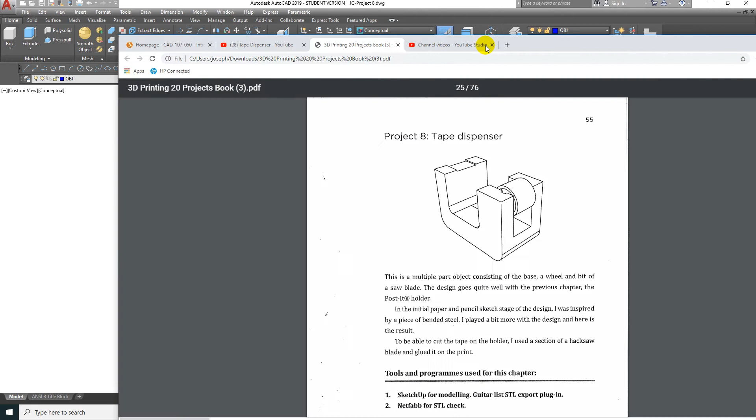Today we're going to model this tape dispenser using AutoCAD, and we're going to take the assignment from our textbook, Projects for 3D Printing, Tape Dispenser. Let's take a look at this project.

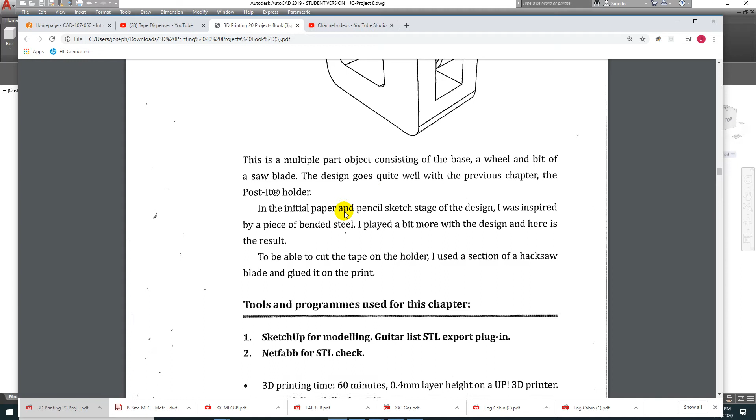Essentially, it's nice. I'm always looking for tape dispensers. We've got the post-it note holder from the last chapter, and we might as well continue to fill our desk with other items we can use to organize.

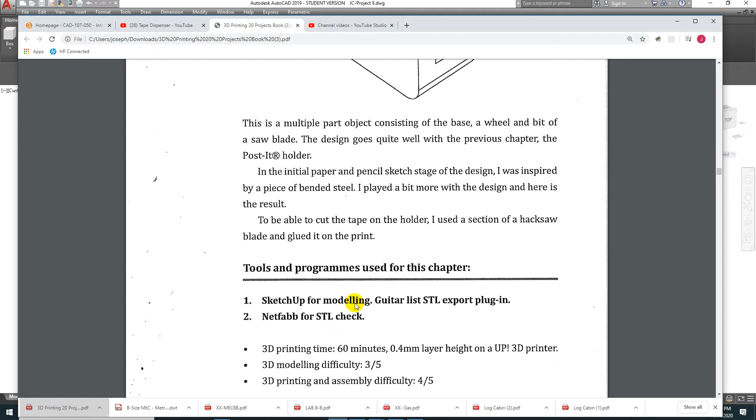He uses a program called SketchUp for modeling it, but we're going to use AutoCAD. He uses an export plugin. AutoCAD allows you to export this as an STL, a stereolithography file, and then he's using Netfabb to slice it for the 3D printing, and we'll use our Dremel 3D45 printers.

3D printing time estimated at 1 hour, 0.4 millimeter layer height, which is a low resolution setting for the printer. He's using an Up 3D printer. Difficulty for modeling is 3 out of 5, and 4 out of 5 for printing and assembly.

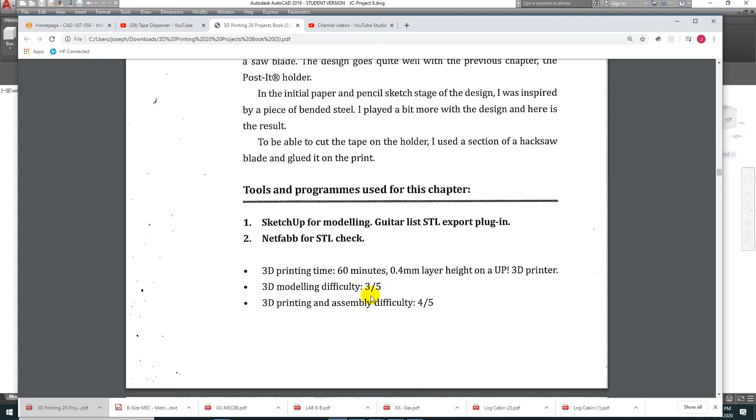It is a little bit more difficult with AutoCAD than with some of the other programs because it still has a lot of 2D elements, but I find I can do everything I need to do with AutoCAD, and the price is right. So if we take a look at the dimensions here, essentially we've got...

Kind of a rectangular shape, and it has dimensions in millimeters, and the way he recommends—and I really kind of like this from a general design standpoint of how to model it—just a step-by-step approach geometrically.

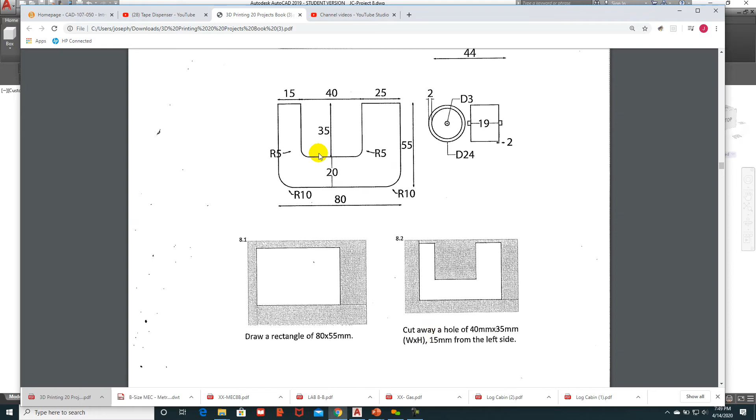So draw a rectangle and then create this cutout, and you can use offset to do that, and you'll get these dimensions from the print. So you have to relate 80 units by 55 units to 80 millimeters by 55 millimeters.

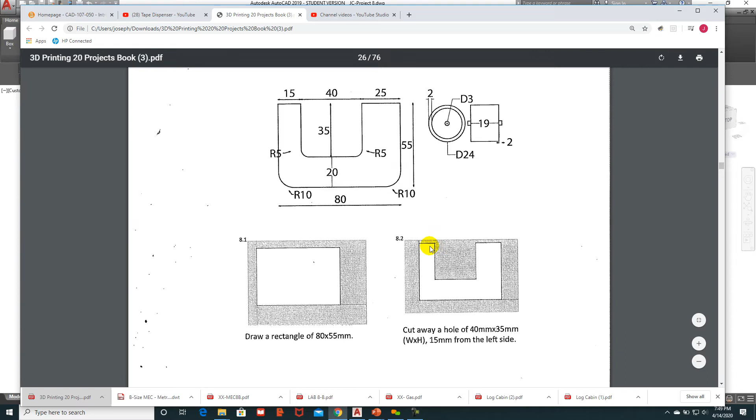And then as you start to learn how to read a drawing, this is 15 millimeters from this edge, and then 40 millimeters from this edge to here, etc.

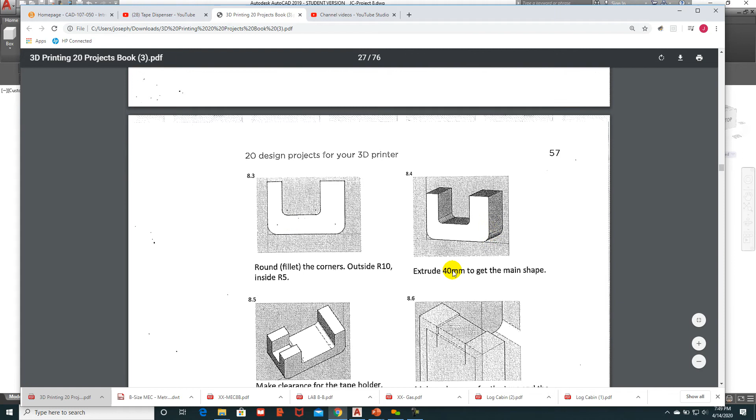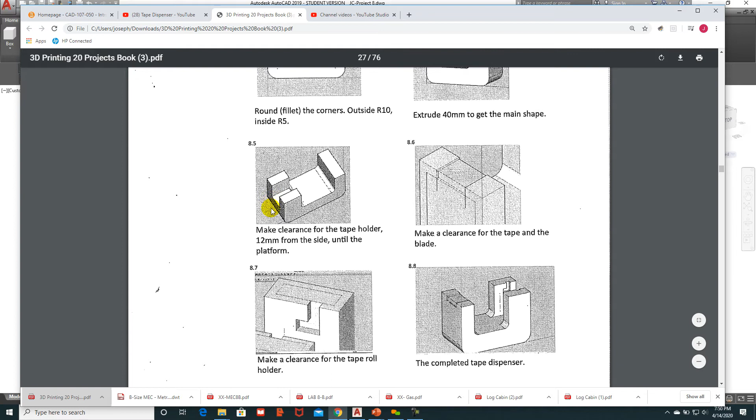Create the basic sketch or the basic shape, and then you can extrude it or press-pull at 40 millimeters. And then to make these clearances, I'll show you how to use AutoCAD with 3D techniques like manipulating the user coordinate system to create these cutouts, and we'll also model the tape holder.

So let's get started.

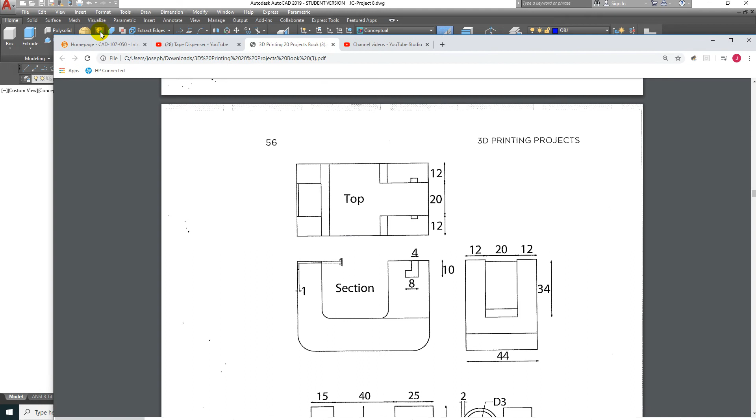I have the completed file here, and in D2L what you want to do is download the metric template. So if we come back here to the home page...

We go to content, title blocks. We have a B-size metric title block, and you can download that and then open it. When you open it, you're going to notice that it might not see it right away because AutoCAD looks for drawing files.

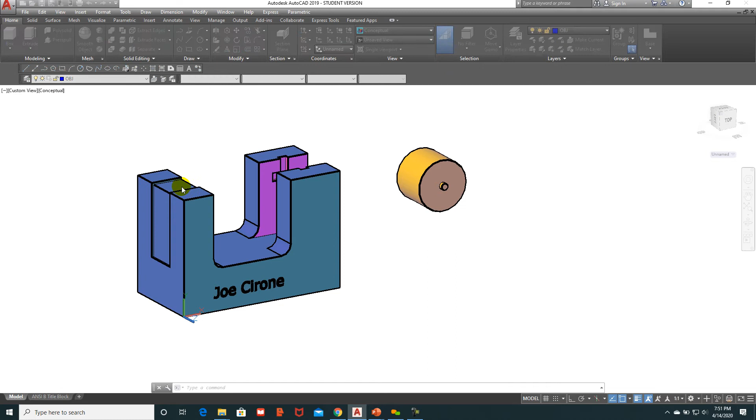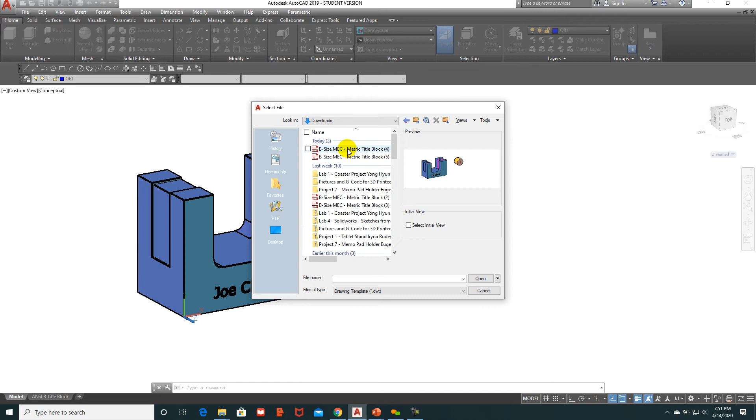Switching back over to AutoCAD—I don't know why it doesn't stay in that path, but we'll have to go back and retrain it to find it where we downloaded it. There it is, my B-size metric title block.

We don't draw the objects in paper space, we draw them in model space, so we'll select the tab here. Paper space is an environment for printing or displaying the object on paper, and model space is where we'll do all the work. What you'll do is start off by setting up the interface.

We're going to use a 3D modeling workspace for this exercise. I've enabled that here, and I'm really not a big fan of the grid—don't really need it at this point. And so here's my ribbon.

I've also enabled the menu bar by going to this little arrow here. I could hide the menu bar, or show the menu bar. These are toolbars that I added because I use them quite a bit—the draw toolbar, the layer toolbar, and the properties toolbar. You can do that by going to tools, toolbars, AutoCAD, and then enabling them and just docking them.

Alright, so we can go with the line command and start with a line, and we can draw that. Let's change to layer object, and we'll draw that. We want that line to track, so we want it to be horizontal. Turn polar on, and there we have our tracking line, and we'll say 80.

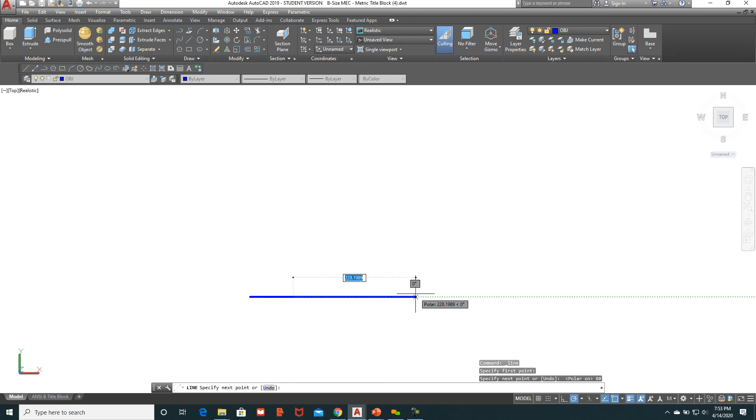And then we'll draw another line, turn the wheel on the mouse, 55, tracking north, back this direction 80, and then close it.

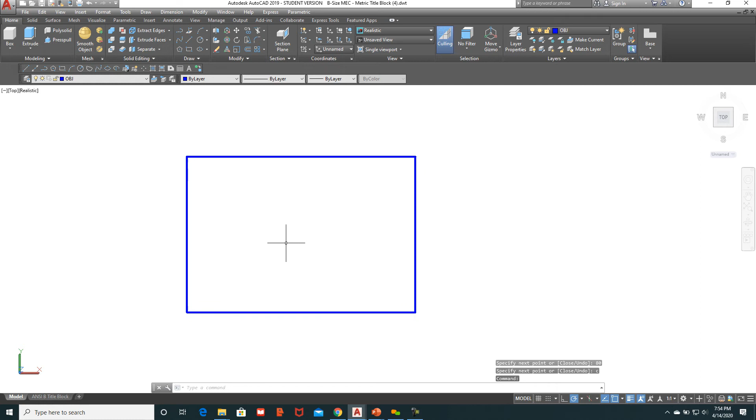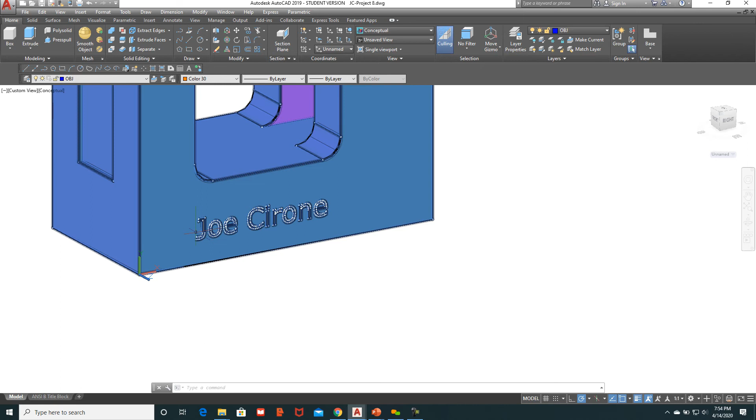And then we can start to create the geometry. Now, to make this part, I already worked on the exercise, so I'm going to display that from my finished model. What I did was break it down into all the steps. I moved the model way out to the side because when you engrave your name on it, you need to use a 3-point UCS and be in plan view. So I wanted it to be all by itself, not with all my other geometry, which is here.

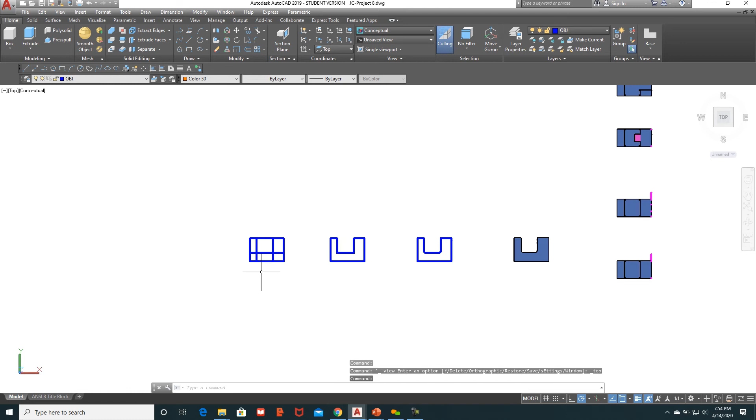So if I go through and explain this, we'll go to a top view, and then we'll zoom in. So this is the 80 by 55 basic geometry.

If we wanted to put a dimension on it, dimension, linear, it'll probably come out a little subsized. Yeah, so let's not. Let's just go to distance, and we'll go from a distance from here to here, and you can see that's 80, and then we can repeat that, and go from here to here, that's 55.

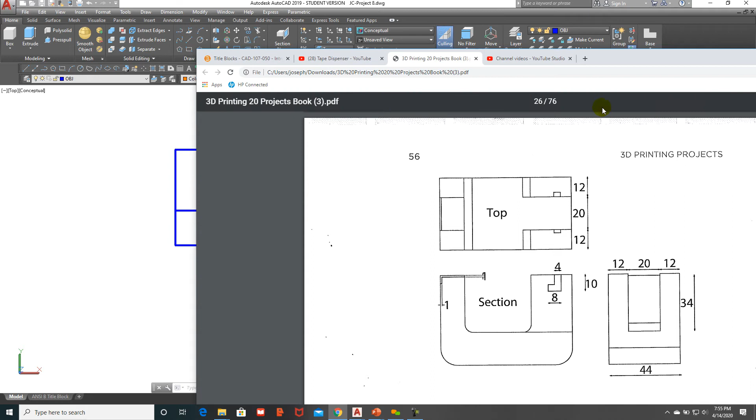And if we look at these offsets, these are taken from the blueprint, and as we start to look at how to model this, this is offset 15, and this is offset 25. So from here to here it's 15, and from here to here it's 25.

I'm going to just update my dimension scale so that when I put my dimensions on, we can see them. So under the Fit tab, when we use metric, 25.4 is a conversion factor, and we'll see how that looks. Much better.

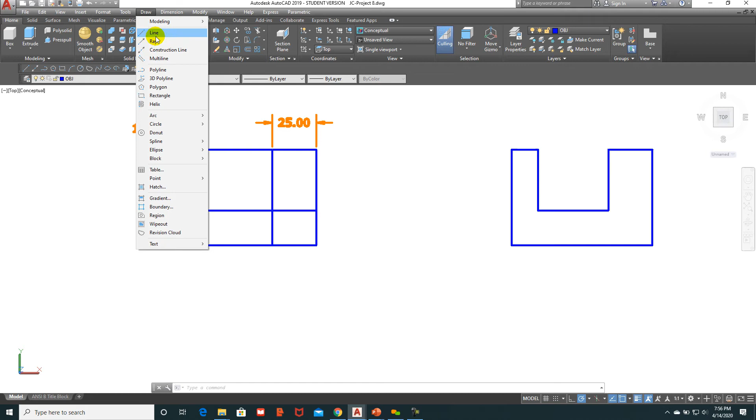And so we model it with these dimensions, or we just basically draw it. This is just a flat 2D at this point, what's called a sketch in your modeling software. You just want to create it to the dimensions that are given in the textbook. And that's roughly how that works out.

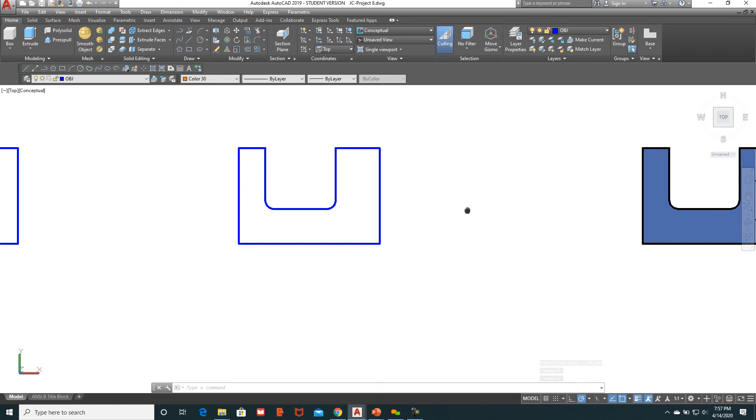And then you can trim out this geometry like this and place a 5 mm radius on this edge. And then what we want to do is to press pull this into a shape.

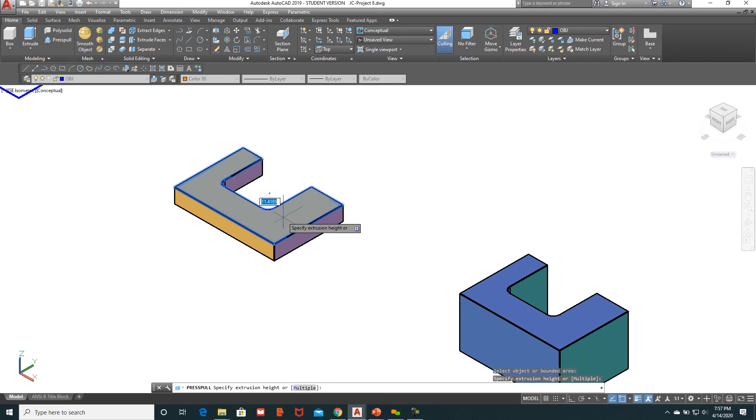So what we would do is grab an isometric view, and with all the geometry we can name a view and restore it. Maybe a little bit easier, but essentially what I did here was press pull it, because when you press pull it creates a region or boundary shape, which if you just extruded it you would get a surface. So you want to make sure this is a closed polyline or a region, and that's what press pull does.

It runs a macro that will select all the geometry and then make a region, and then we would make that a thickness of 44 millimeters. And then what you would do once you've done that is to take the geometry and 3D rotate it.

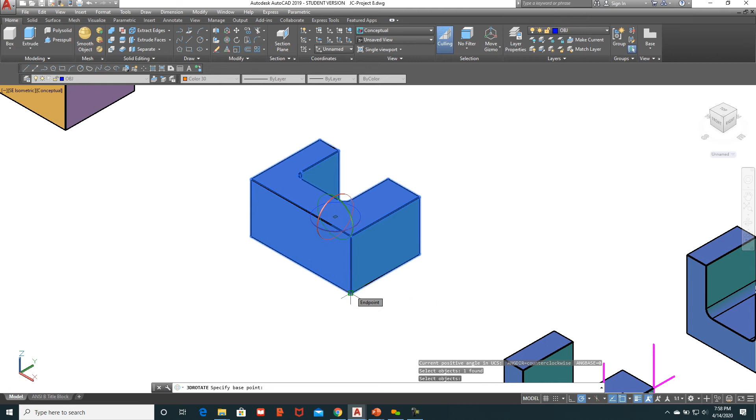So once we have done that, we would use the 3D rotate command. You select the geometry, press enter, and then specify using an O snap a base point, and read the prompt. Down here at the bottom it tells you what it wants.

Pick a rotation axis, so I'm going to pick this red band here, and then it says select the starting angle, and again you want to track it so you see that green line, and then bring it over this way until you see the green line again.

Now if you make it a little bit off, it is difficult to fix, because 1 degree off of perpendicularity is not good. So if you have trouble getting it to track out like that, use ortho, and then you can only move it in 90-degree increments. You can do that if you've had too much coffee.

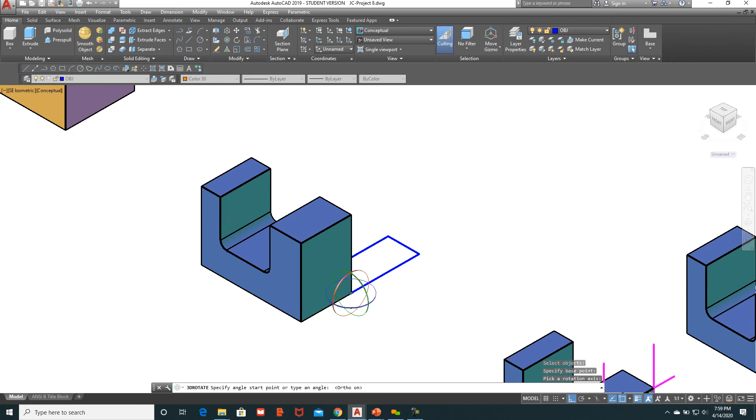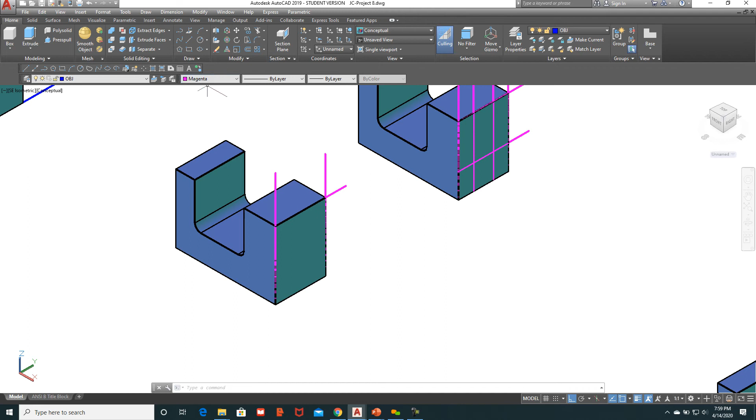Then once we have that rotated into the correct orientation, you cannot offset a solid. So there's a number of ways you can extract the edges and put geometry on, but what I do is just old school: I'll go into my object layer, change the properties, which is the color, and then trace over the edges of the solid model.

Now you can trace over the edges, and what I recommend is you do that in 2D wireframe so you can see it. Then what you need to do is the calculations to offset and create this shape here, and you want to use a 3-point UCS on that.

So over here, even before you trace over it, what I'd recommend is you type in UCS, and then select 3-point, so I'll just type in 3. I could also hit the down arrow, I believe.

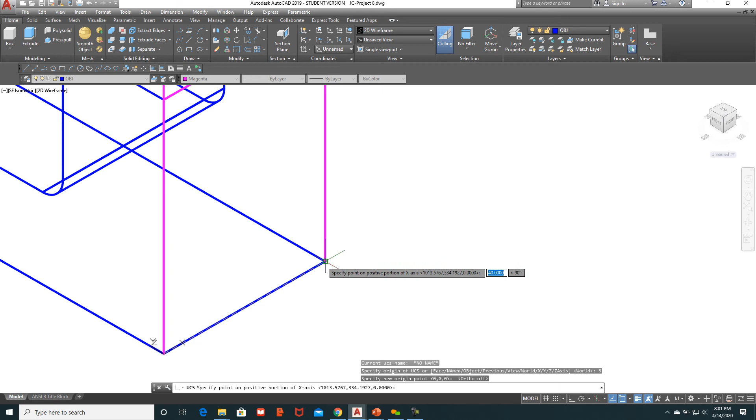It doesn't have 3 on here, I don't know why. I've always used the 3-point UCS, but I'll say 3 for 3-point. The first point will be the origin. I have to take off ortho, that's making it jittery. Then it says positive X, so I go positive X, and then I'll go positive Y. And that sets up the UCS icon.

When you think about 3D drawing, what you're really doing is just manipulating the XY axis. And so now we're just drawing on the side of this.

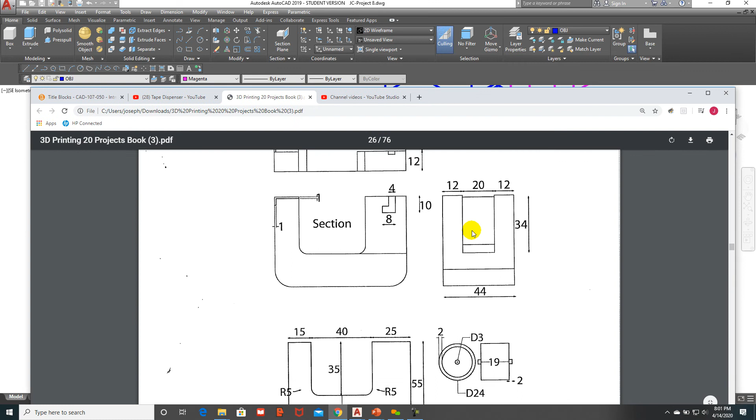If we wanted to create this construction over here, we can look at our tape dispenser cutout, and we can say that cutout is 20 millimeters, 12 from each side. So I traced over the edges, and I extended them out just because I like to exaggerate it. Once I've traced over the 2D geometry onto the solid model, I'll offset this line 12, and then offset this line 12 the other way, and then this will be 20. It's just the numbers all add up that way.

And then what I did was I trimmed it, and then I press pulled it. But you don't necessarily have to trim it - I could just press pull it.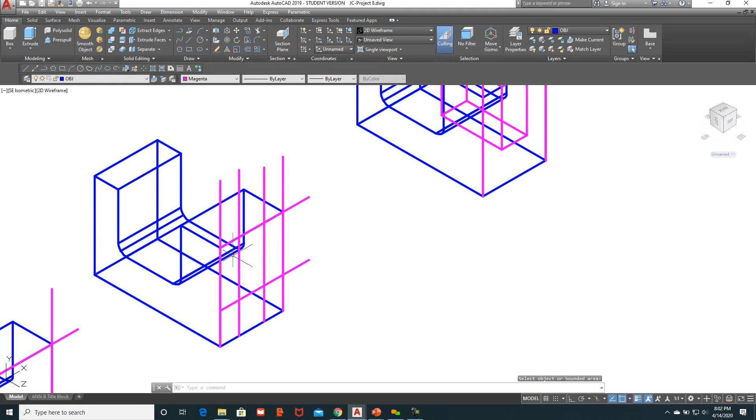If I go and say press pull, and I hover right here, you can see it's acquiring it. If we do it in conceptual, I guess it just looks cooler, but it eats more processing time. So you acquire it, and then you just pull it through the geometry right there. With press pull, when it goes into another solid, it will subtract it. And there we go, we've got that subtracted out.

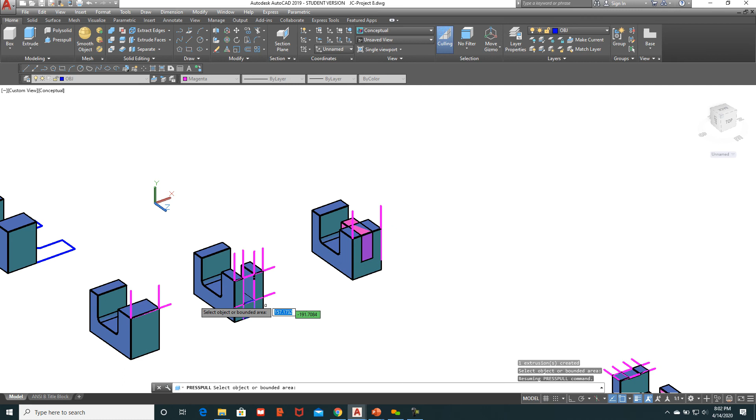So that's what this component is for this tutorial. And then we'll come over here and we'll use that same technique where we're going to put a 3-point UCS on the top of it, and then we're going to press pull this down 1 millimeter.

The way that would work would be, we have the geometry over here, we've already cut out this part, and then we'll put a 3-point UCS on it. So again, UCS, type the number 3, and then origin, where X and Y and Z meet, positive X direction, use an endpoint OSNAP, positive Y direction, and then the Z-axis will be perpendicular to that. So now we're drawing in the XY plane on the top of the tape dispenser right here.

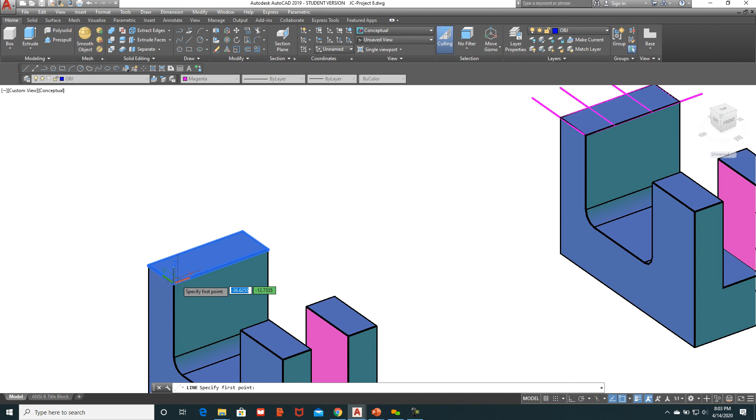What I like to do again is I just like to trace over it and kind of exaggerate those lines. So if I come in here with a line, you want these lines to track and to be straight. So you put on your polar - if it's 1 degree off, it's not going to be as good as if it's directly on 090.

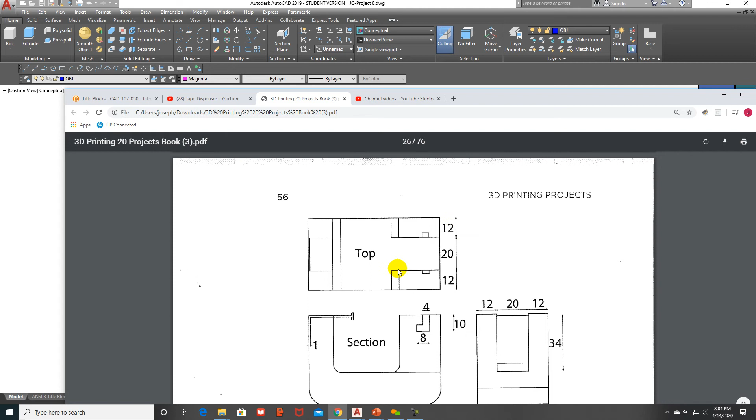And then I can take and look at my print, and I can say, okay, how far is this in here and this one? And it's 12. He made these line up, or at least I will, as we go through and we do that.

So you need to know which view to look at in what's called an orthographic drawing, which shows you the front, the right side, and the top view. He says this is a section because he cut it down the middle so you can see this little relief for the tape dispenser wheel.

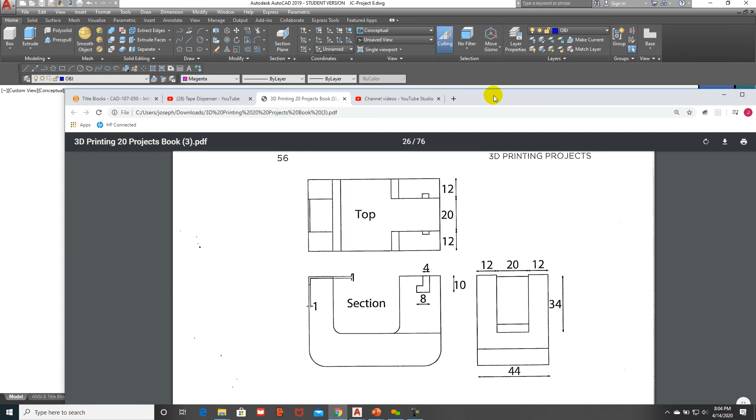So we're going to just offset this 12, 12. I can come over here and I can say offset 12. I can do the same technique on the other side. Yes, I know I could go 20 the other way and just continue going, but I like to follow the blueprints as I develop my drawings.

It takes time. And then I need one more on the other end because I need an enclosed boundary when I press pull something. So that's what this is over here.

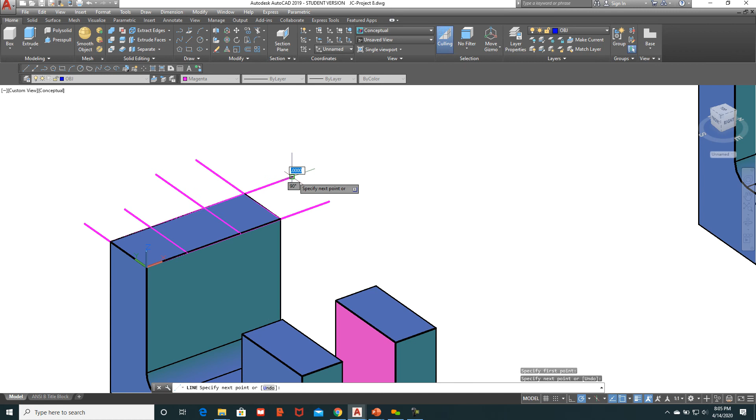I basically just traced over the top of it with the 3-point UCS, and then I'll come in here and I'll press pull that down 1 millimeter. Press pull, hover, and I'm hoping I'm acquiring just that, and I did. We'll say 1, enter, and that will make the relief for where we'll put a little blade.

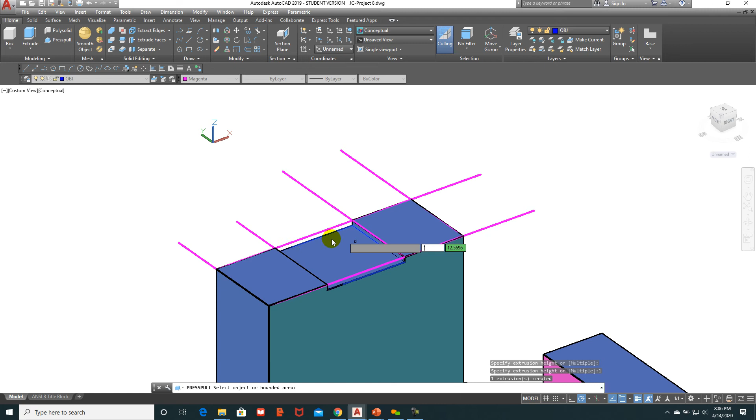I used a hacksaw blade - I just cut it on a bandsaw, but if you have some saran wrap or aluminum foil in the kitchen, save it, save the empty box, and use the little cutter for the aluminum foil or the saran wrap. Then you can just super glue it to the top there, or you can drill a hole in the saran wrap blade and put a little screw through it.

That works as well. So we go through and we create the model for the top, and then we do the same thing for the front of it. Again, it's the same technique where we can't offset the solids.

What we want to do is create a 2D geometry on this surface by going with UCS and then the number 3 for 3-point. Yes, here it is right here, you can pull it right off the menu, and if you hover long enough you can get into the help screen. Then we'll go: origin, positive x-axis, positive y-axis. It doesn't ask you for z because it's always perpendicular to the xy axis.

And the direction of the z is something called the right hand rule, where if you take your right hand and hold it up on your desk and point your index finger and thumb, your other three fingers will point in the direction of the positive z rotation angle. It's more old school stuff.

But we just press pull this 1 millimeter, and so the same thing. I'll come in here, press pull, and as long as we're in that XY plane, you can just hit this right like that, push it in there, 1, and that is now properly modeled.

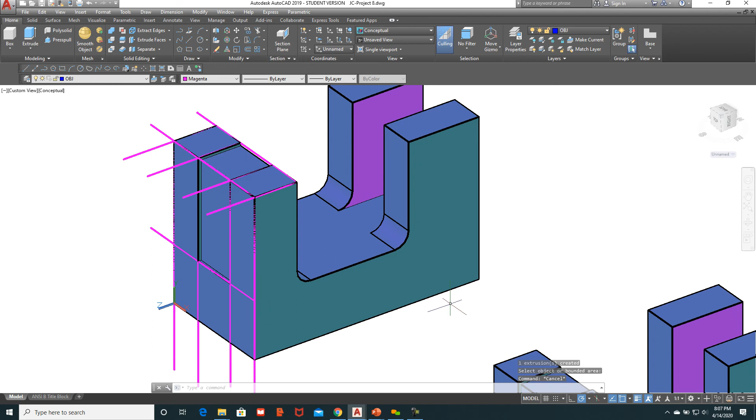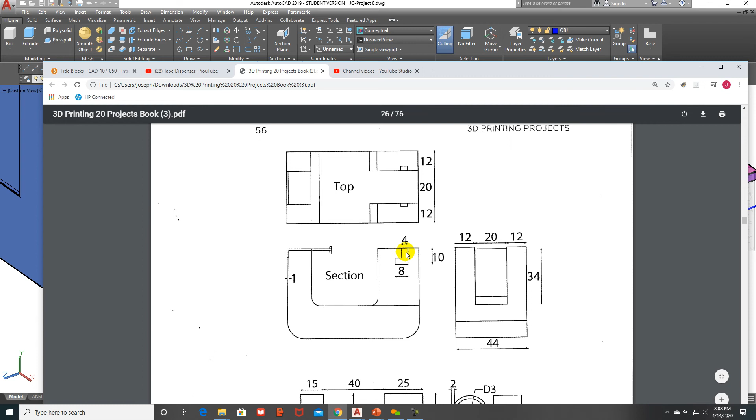To do the cutouts, what I did was go through and add the dimensions to the geometry here. If we take a look at the sketch from the textbook, he doesn't really locate it on the side here, and I think I put it 10 millimeters from the edge. So what I did was create the 2D geometry with these measurements: 4 millimeters is the width here, and it's also the width here.

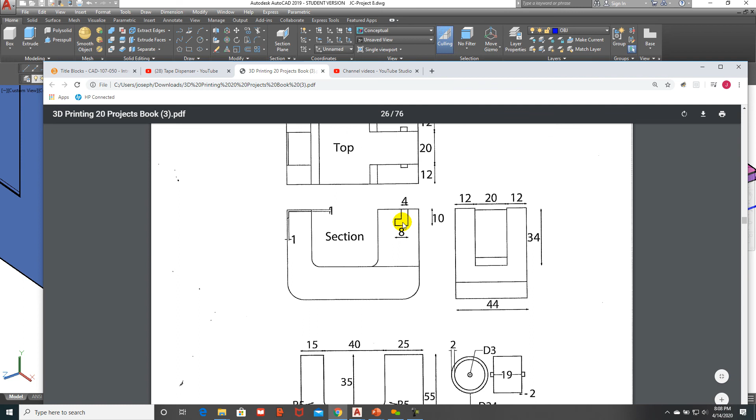So think of it as this 3 millimeter wheel is going to rest in this 4 millimeter slot, and so there's 1 millimeter of clearance, or half a millimeter on each side. That'll work so that you drop the tape holder in here and then slide it up, because when you pull the tape off, you don't want the tape to come out, so there's a tendency if you put pressure on it, and so you put this little bend in it.

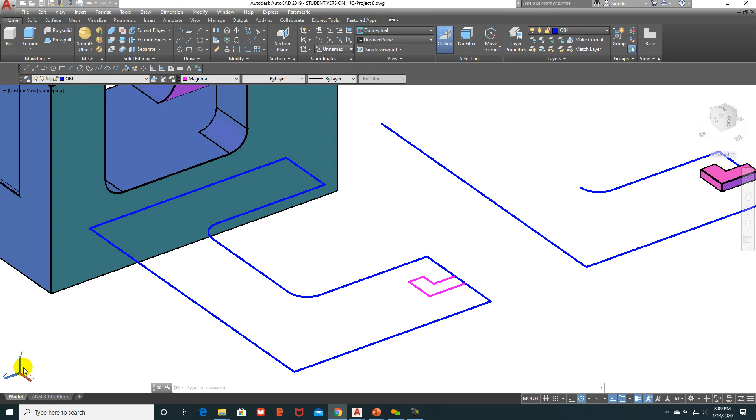So getting back to the drawing, the technique is basically to create the 2D shape, and then you need to put the UCS back so that you can draw it that way. If I say UCS, enter, I'm going to have to click in my screen, UCS, and then here's my options here, and world is the default.

Think of yourself on the earth, and north is north where Alaska is, and south is where the South Pole is. So when you start to think of coordinates in CAD, they model it on the world axes. When we go with world, what we're doing is setting up our default, which way is up.

So make sure you set the axes back with the UCS command. Just say UCS, enter, and then W for world, and now you're at the default, which is what the title block opens at. Then you can go through and create this geometry, press pull it 2 millimeters.

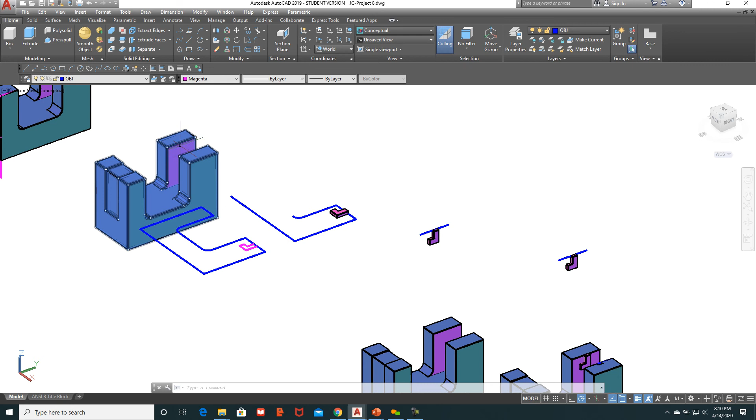And then what I did was 3D rotate that, because this is kind of flat on the table here where the elevation is 0. So what I need to do is find a way to bring it to this location here on my tape dispenser.

So if you 3D rotate this by saying 3D rotate, and I'm just going to type the commands in, I can show you where they're at on the interface, but we'll select this geometry, and I want to take the line with it, because this line I can use to locate it on this surface.

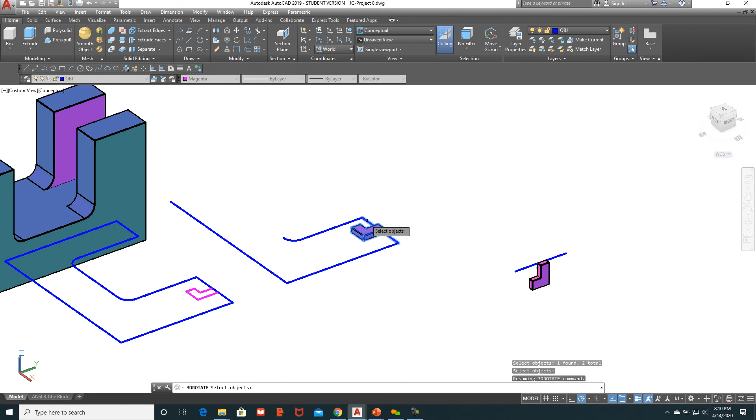So I'm going to say 3D rotate, I select the line and I select the geometry, I hit enter, and then I can just go and say, okay, put the axis here, rotate it about this red axis, starting angle, and then if I turn it till I track again, it's like that.

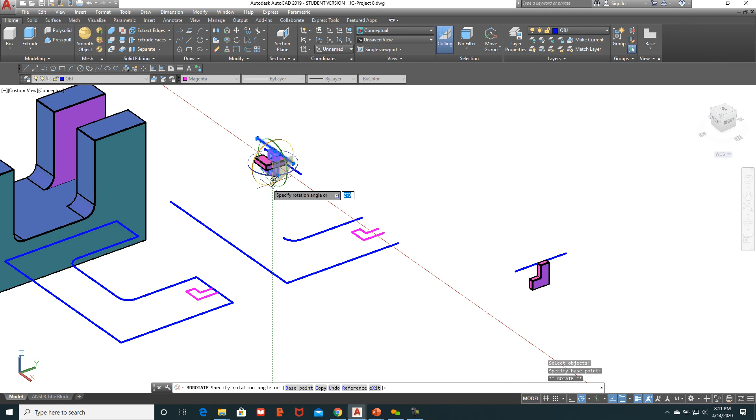And then I'm going to have to rotate it again with 3D rotate to get it into the right orientation. So 3D rotate, and then I grab that little handle here so that I can put that on the end, and then I can rotate that. Looks like I grabbed the wrong axis.

And if you do grab the wrong axis, then undo it and get it back. If it's, like I said, just a little bit off, it can be a problem.

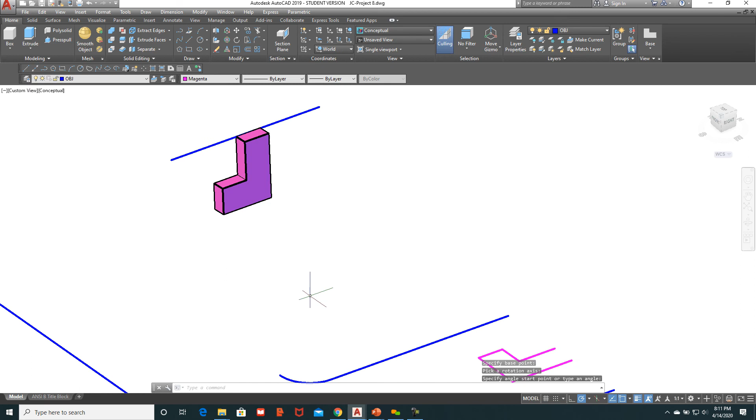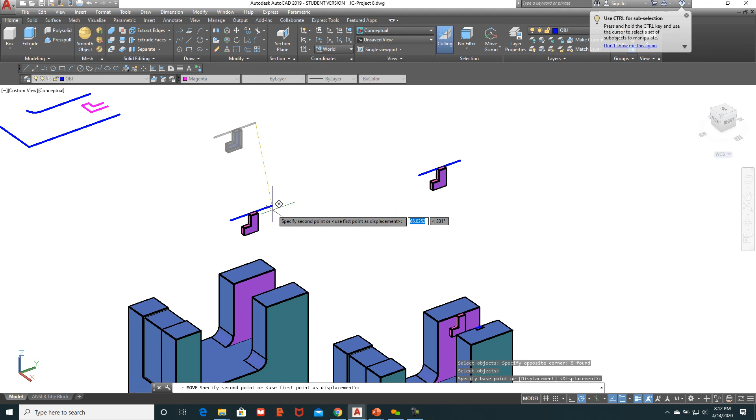Starting angle 90 degrees, ending angle. What I did was take that shape and put it on here to subtract it. You can use a regular move command. If I come up here and say move and select the geometry, I can move it from this endpoint because that helps me locate it on here.

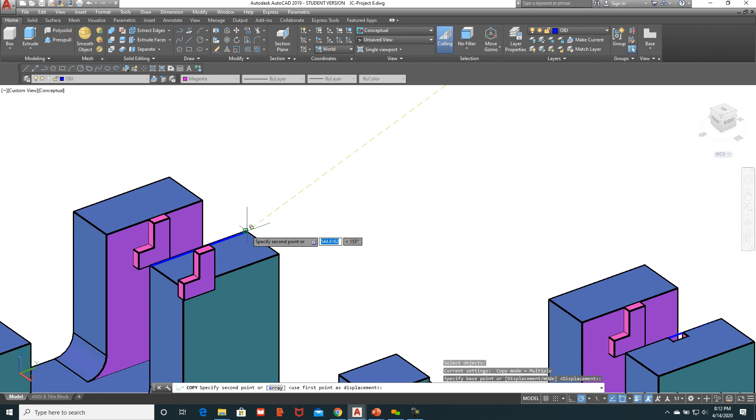I can also do the same, and it might have been better to copy it, but either way I've got a spare one over here, so I'll copy that one because you need two of them. Now copy that from that endpoint, and what you'll notice is on this side it's actually all set to go because it's ready to be subtracted.

But on this side I'll have to move the geometry in, using a regular move command. I can say move, select it, hit enter, move it from the endpoint to the endpoint like that, and then create a subtraction. Select the large tape dispenser, hit enter, and then select the pieces you want to remove. That one, and it removes it.

You'll notice that sometimes the sketch lines are still there. I can delete that. And then if I hold shift and push the middle mouse wheel, I can orbit. You can also use the orbit tools over here. And then again I'm going to subtract it.

I'm going to select the larger shape, hit enter to end the selection of the larger object, and then select the object to be subtracted from the larger object.

When you think about this subtraction process, it basically works like this: the little fish can't eat the big fish. So if the big fish is the model and we're going to subtract a little part from it, you have to select the larger shape first, hit enter, and then subtract the piece from it like that.

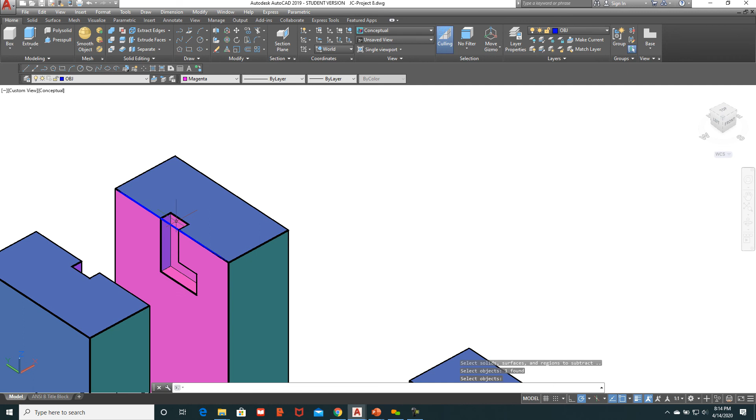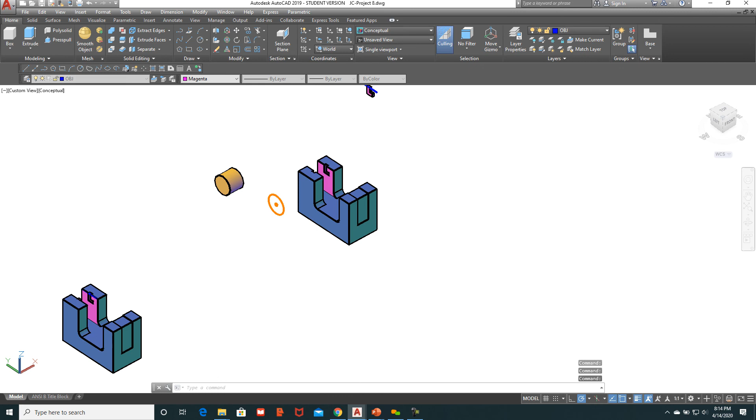Again I have some sketch lines, so this is pretty well ready to go, except we want to kind of brand our stuff. So what we want to do after we've got that modeled is to model the tape dispenser.

What I did here was just draw a circle, and the circle diameter is given on the print here: D24, that's diameter 24, D3, diameter 3, and then 2 is the amount that we're going to have for these little pins that come out here.

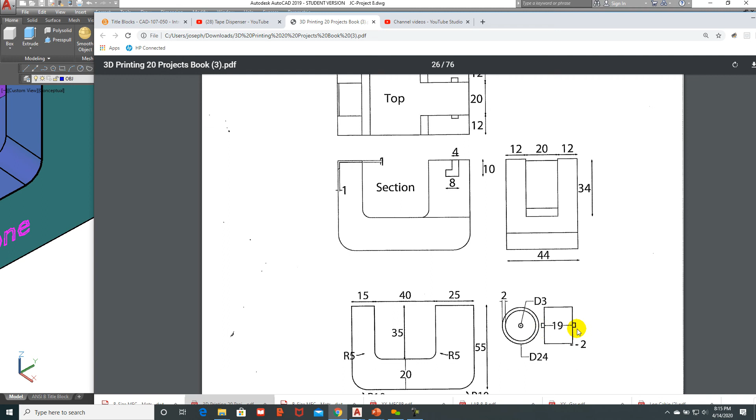When we come back here to this CAD geometry, this is a 24 millimeter circle, and this is a 3 millimeter. Basically all I need to do here is put the UCS in the right orientation, because I don't believe I can press pull it in this orientation -- never mind, it seems to work.

So it's smart enough to know that, and I can press pull this 2 units, or I could go this way 2 units. Let's do this. Let's go 2 units this way because it's harder to see in the complete modeling of it.

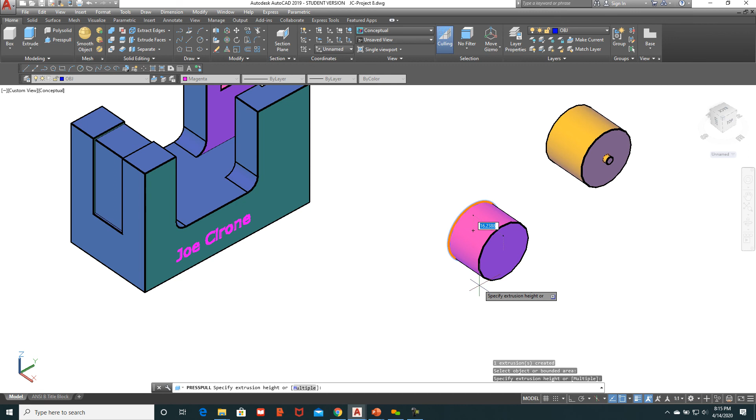And then on this one we'll go 19, and then rather than go through and create a sketch and put that on there, I'll just take a shortcut and copy.

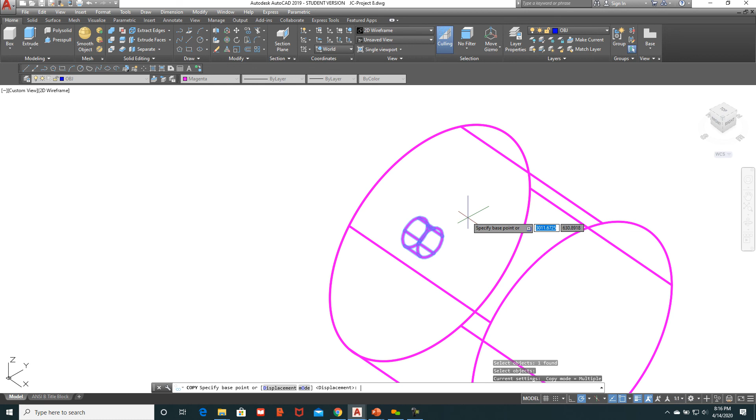It allows me to copy the other cylinder because I haven't unioned it yet. So I'll copy, select that shape, hit enter, copy it from the center here to the center here, and then I will union it.

Unioning will fuse these two parts, and you can actually see it when you go with conceptual view and union it, because you'll see like a line appear here. So if I come in here and union this shape, this one, and don't forget the other side...

I'll just do 2 right now, but you do get -- you can see it highlights the entire object. And then when I come here to the other side, you'll notice that this one is separate because it hasn't been unioned.

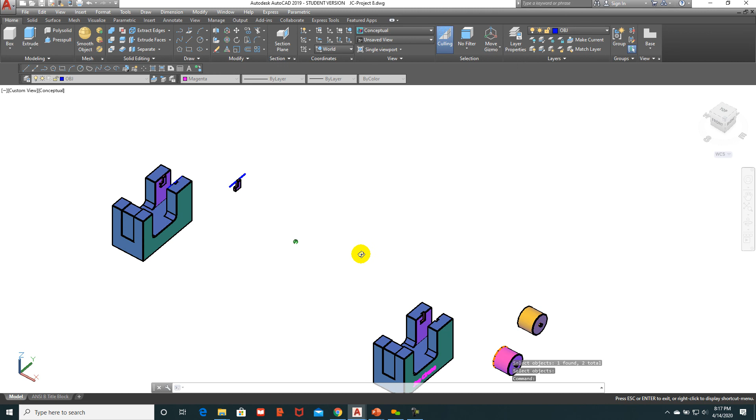So union is kind of like the beginning 3D modeling command, back when AutoCAD had the advanced modeling extension in version 12. I believe it came out in 1995. I was working for College of Lake County, teaching at the vocational center.

So what we're going to do here is put our name on it, and you could put a symbol on here or something, like a company logo if you wanted to.

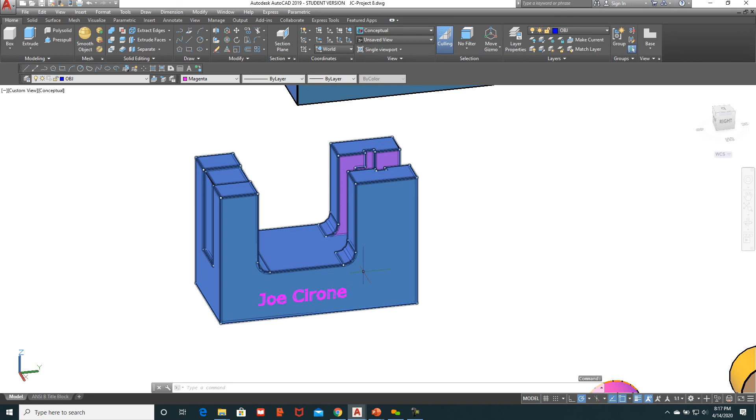The way we do that, when we do this, is that we need to have a 3-point UCS on the face of this, so I'm going to check this in wireframe.

If I right click and go to the quick properties, it's going to tell me it's text. What we do is put the text on, and you can just use regular text tools, but to make sure it's on the right surface, again, UCS and then 3-point, and we're going to put the XY plane on the front of the tape dispenser.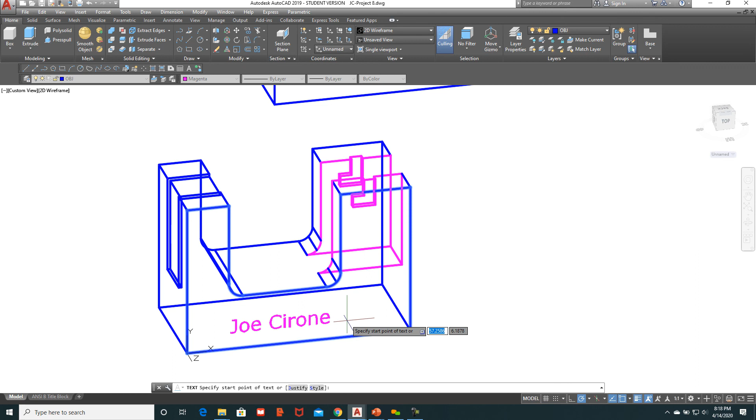Then we can go in and put our text. I can say draw text single line, and there it is, single line. So I can say, okay, draw it right here, height 5 millimeters is fine, enter. Rotation angle 0 means it'll be horizontal, and this will say Joe Cirone Tape.

Alright, now -- might as well just make it possessive, right?

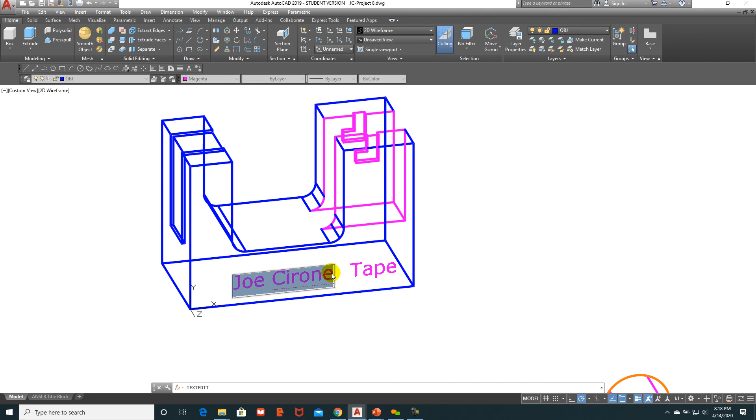And then I can move this a little bit. Whoops—as long as I don't stop my recording, I'm okay. Move this. And like I said, as long as you're in the XY axis, this is all just like working on 2D.

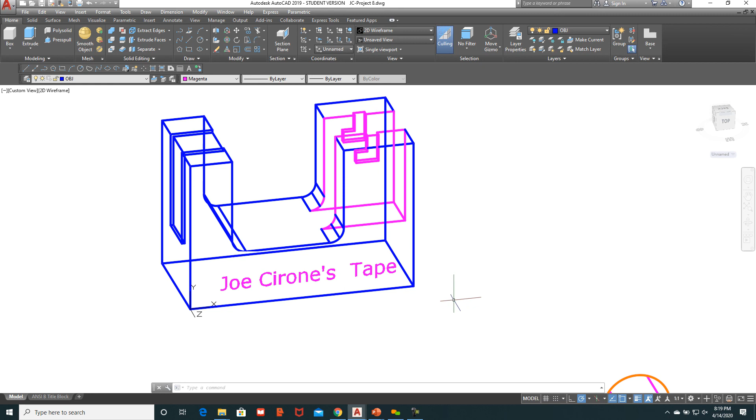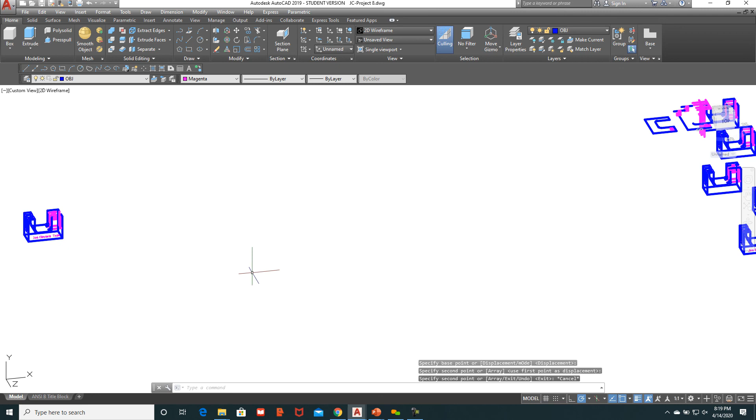Now, in order to get this to be able to be engraved into the part, we have to get a plan view. So I'm going to copy this over to the side because I have so much geometry that we'll have all the other ones in the background. I'm just going to bring this from here way over to here. And when I do that, I left the UCS with the other model, so I'm going to put it back on there.

UCS. If you're doing this, you don't have to because you're just working off of one model—I'm just managing step by step. So I put the 3-point UCS XY plane back on the front of it.

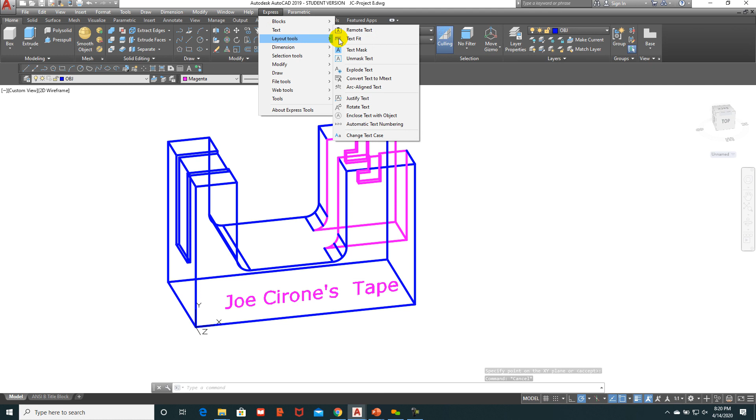And what you want to do is say PLAN, because you have to be in plan view in order to use these bonus tools. If I go up here to Express Tools and try to explode the text, it tells me it needs to be in plan view, or X coordinate Y Z 001.

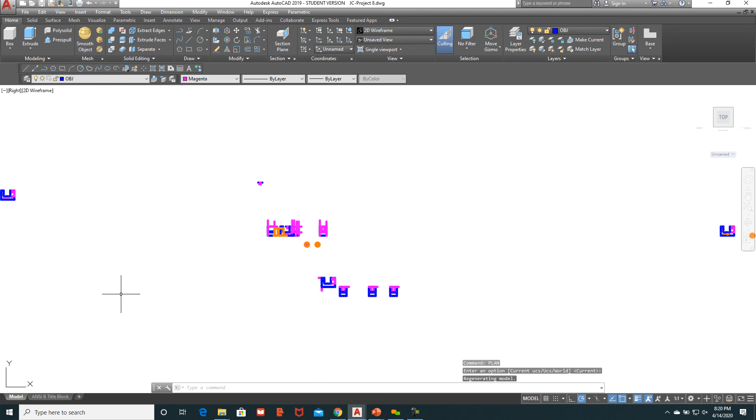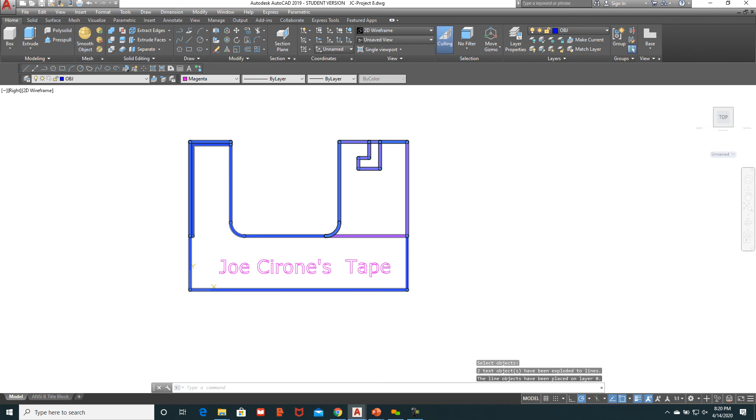So what you need to do is go and have your UCS on the front of the part with 3-point XY, then type in plan, enter, enter. I put it over here because there's some clearance and I don't have all the other stuff behind it. Now I can go to Express, say text, and explode it—explode these pieces of text—and then it turns them into geometry.

Then what I can do is simply extrude them—let's go with green—and we'll make that slightly like that, and say extrude. I like extrude because it's faster than press-pull; if I press-pull, each one of these pieces takes longer. So I'll extrude it.

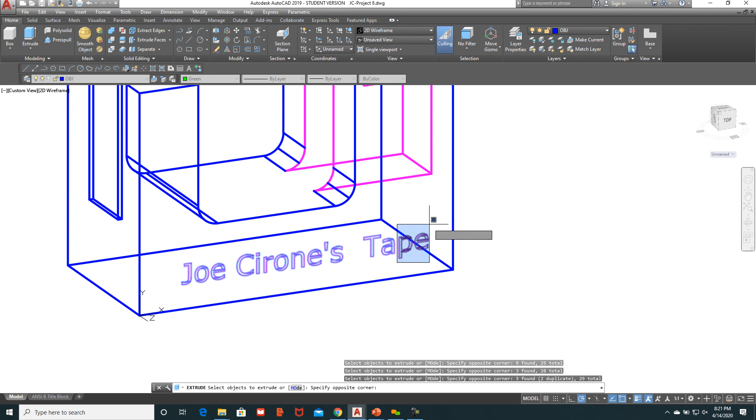I'll select the objects to extrude, hit enter, and then it jumps right into the extrude command. Now we want to press it into the part, because if we have a positive when we 3D print, we'll need support material since that'll be kind of hanging out into space depending on how good our 3D printer's bridging is. So I'm just going to push it into the part, and I'll say 1 millimeter.

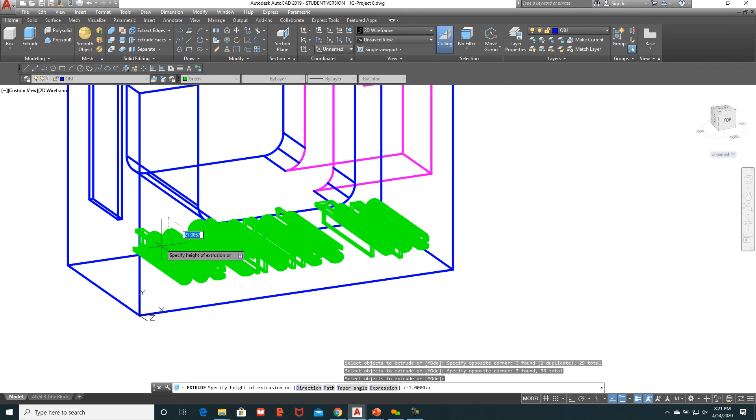And if I go through and verify this with a conceptual view, we have two solids occupying the same space, so we want to subtract it. I'm going to go back to wireframe, and then I'll go to subtract.

I'm going to select the large shape of the tape dispenser as my base, hit enter, and then I'll select each of these letters, being careful not to get anything other than the letters as I go through and select them.

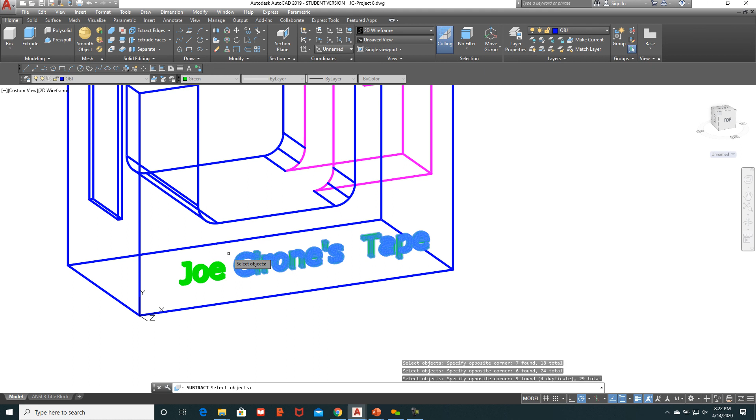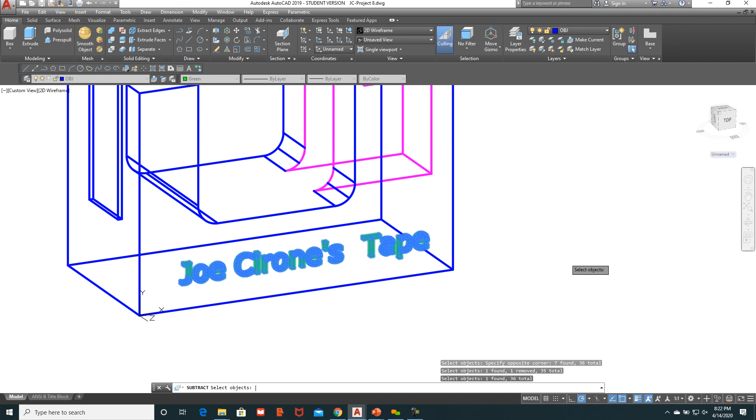If you do select something extra, you can hold the shift key and click on it—shift click—and it'll deselect it. Then if I click on it again without holding shift, it re-adds it to the selection set; you can see the selection sets add up here. Then I'll hit enter, and you could tell it did something significant because it took a little while to compute.

And so that's the tape dispenser. With the wheel, I modeled it in the other area.

You're going to want to save it, so you can go Save As, and we'll save it as our initials, project 8. I'm going to add an X to mine because I've got one already.

And then you're going to want to export the STL, so we'll go to export, other file formats, and export it. It'll tell us the name, which is fine. We'll save that, select the object, hit enter, and then it'll create that file. We'll make another video showing how to take that into the slicing software and prepare it for 3D printing.

And that completes exercise project 8.